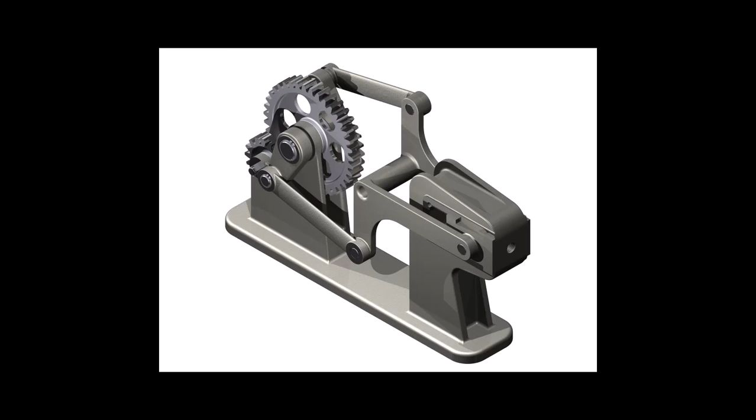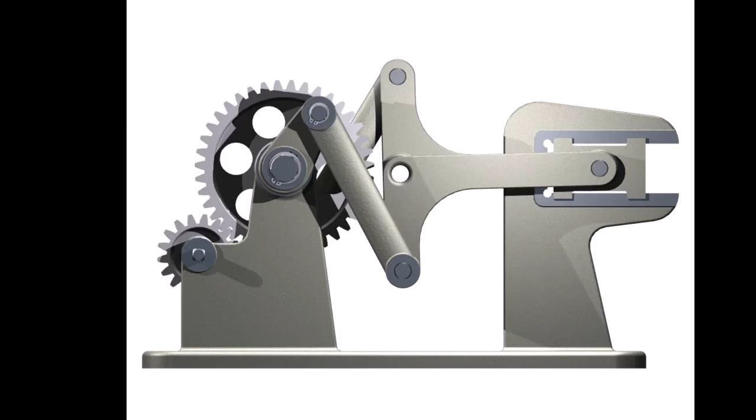Hi my friends, today we model this interesting assembly which is called double crank mechanism, and I want you to notice that the moving translation stops 3 times, which is important in some cases.

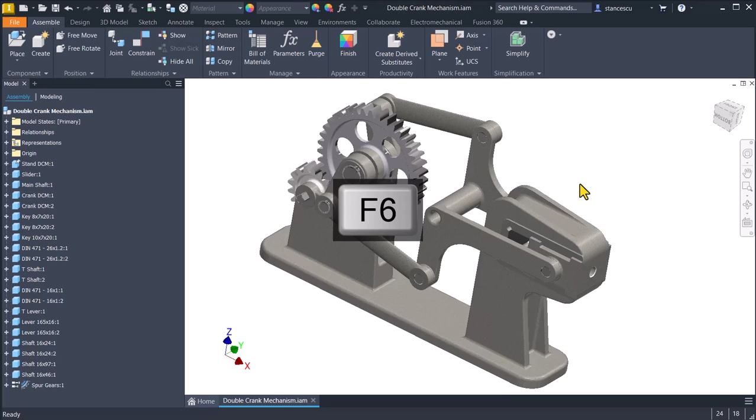This is the mechanism. You see there are some components here, and we want to place all of them to obtain the mechanism. All these are components of this mechanism.

If you are interested to create the spur gears, I recommend you take a look and watch my tutorials number 143 and 287.

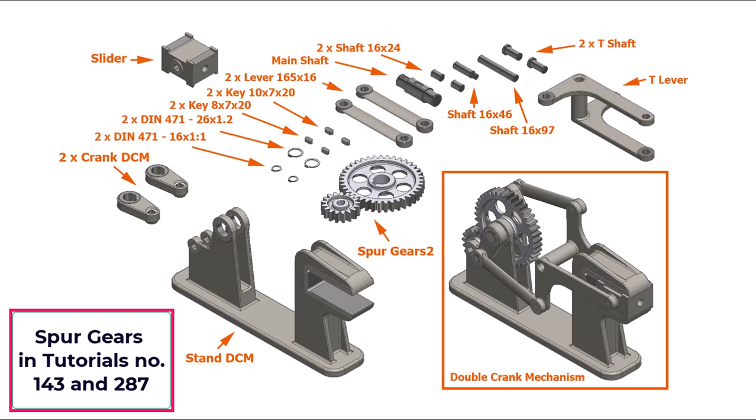Components are made with Inventor 2014, and you can download all of them if you have at least the journeyman level in the membership. After this overview, let's start building the assembly.

New standard millimeters IAM. Place.

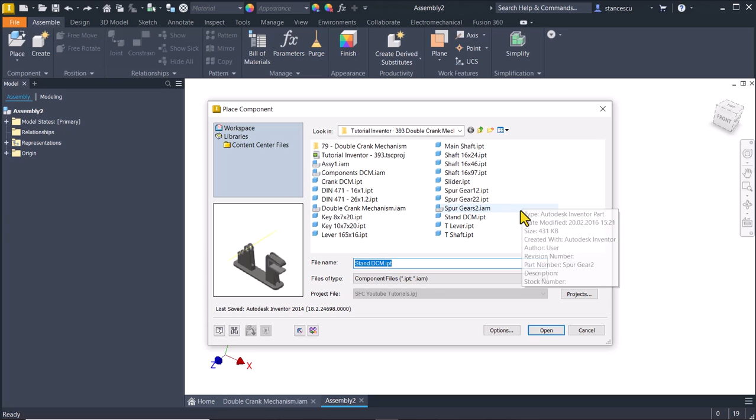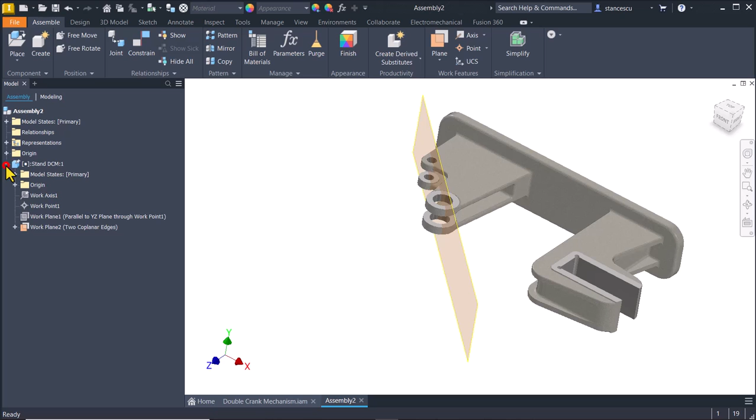We place the main component, stand DCM, grounded at origin, and as you can see, here is a plane which is not useful here, so I go to this and I apply visibility.

Again, we have to rotate this because now we work with Inventor 2024 and not 2014.

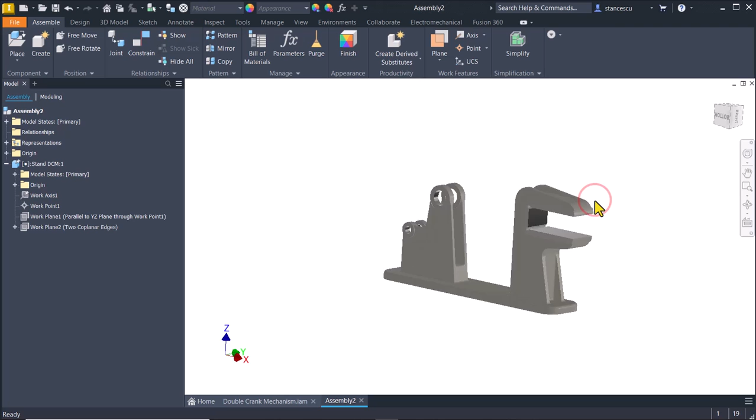Set current view as home, and we have the proper position. I want to apply edges, shaded with edges, to have a better look.

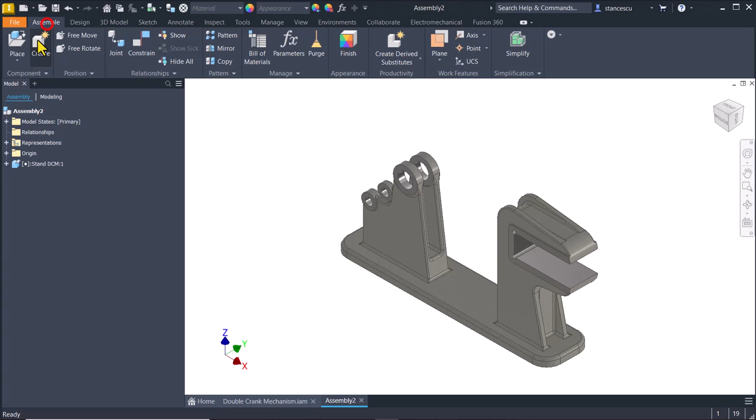Good. We add the spur gear, which is an assembly, as you can see. These two are an assembly, and I told you how you can create this assembly.

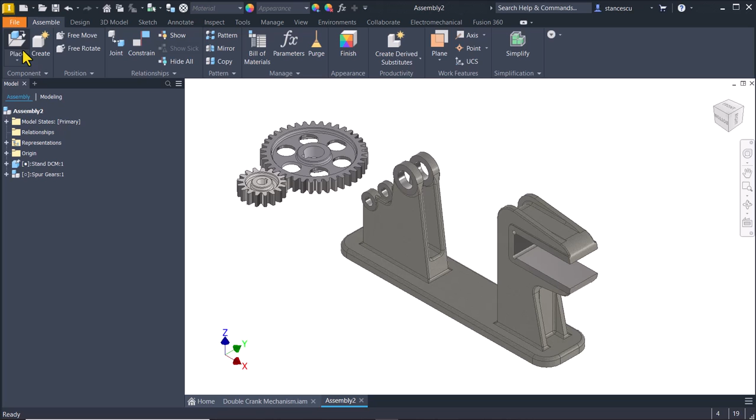Open, place here, and constrain. We constrain with the insert this circle axis to be placed here. Circle axis.

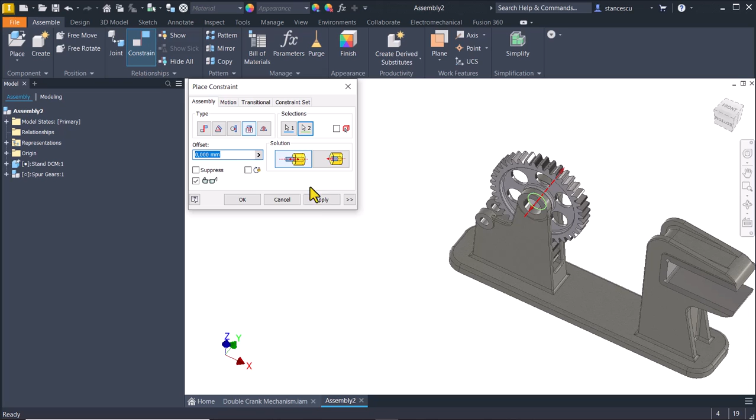Okay, now we can rotate all of this together. They are not flexible, you see.

We place now this point on this axis. Apply.

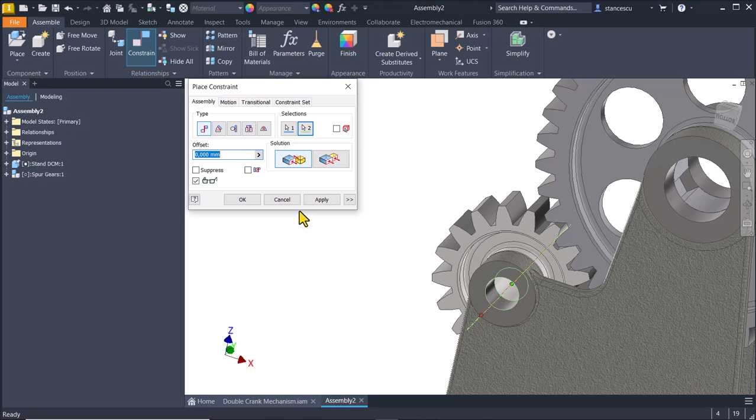If I make this flexible, we have a surprise. The surprise is that you can move this along.

Control Z, and we apply measure M from Monaco between these two faces.

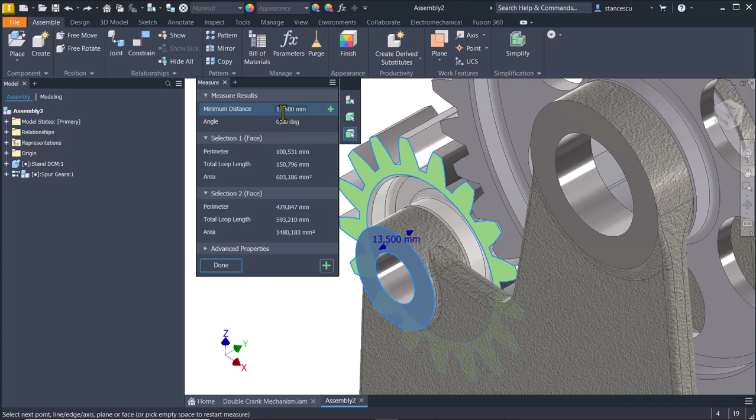13.5 is the distance. We use this distance to constrain with the flush, 13.5, between this face and this face.

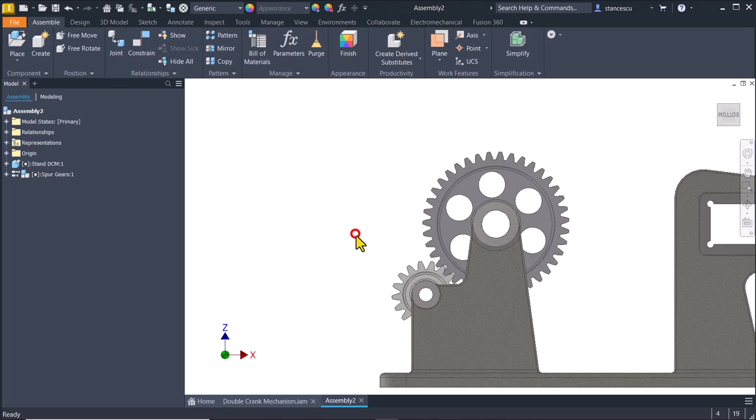Okay. Now we can rotate without problem this assembly, mobile assembly. Control Z. I place it in the first position.

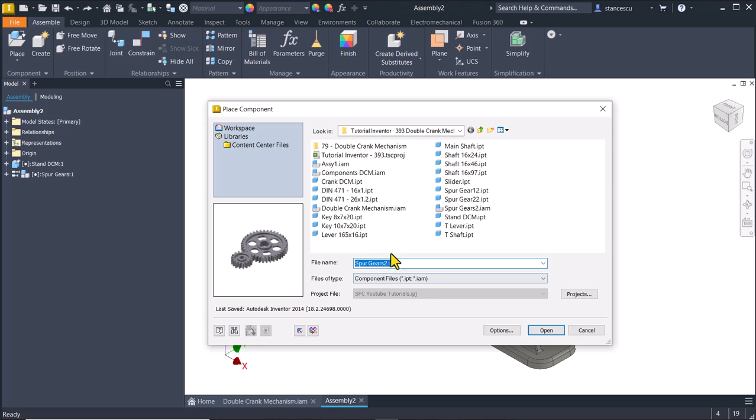Then we add some other components like main shaft. This is main shaft with keyways.

This one is the smaller, which are in 2 number. Then the other one only once.

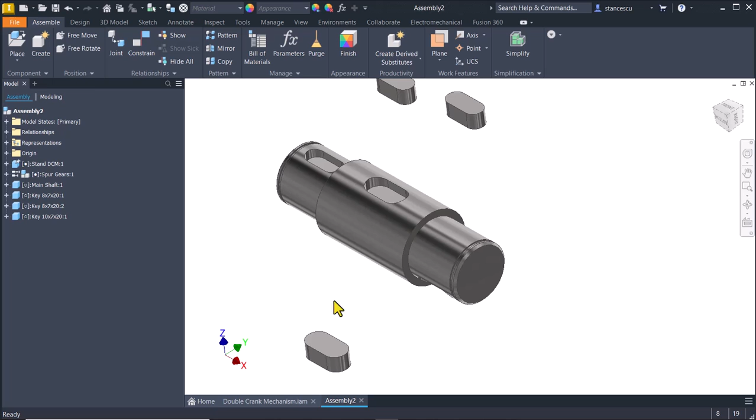We place, this is bigger, it comes here. Constraint, insert, this axis circle or arc and this.

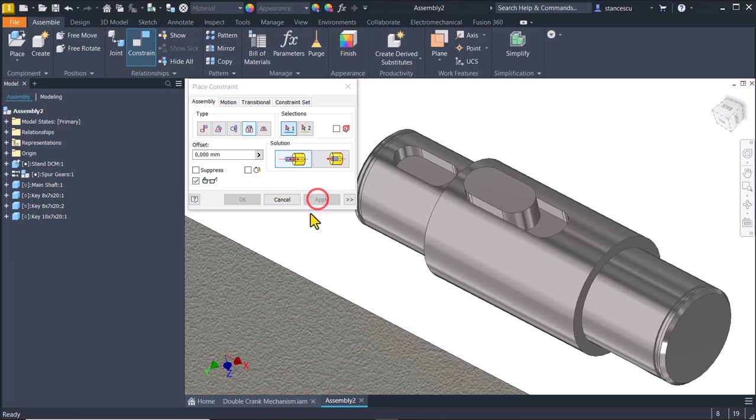You see, it is reverted. Apply. Then mate of this face to be placed on this face. Okay. Apply.

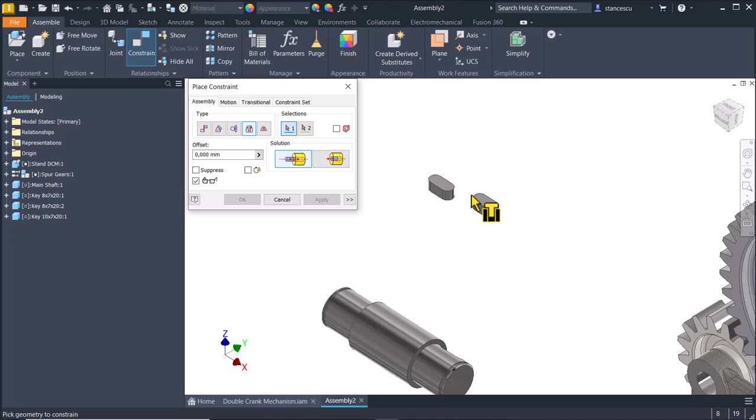We go now to the other keys. This one with the same constraint. Apply,

and this face comes to this face. I rotate it, you see.

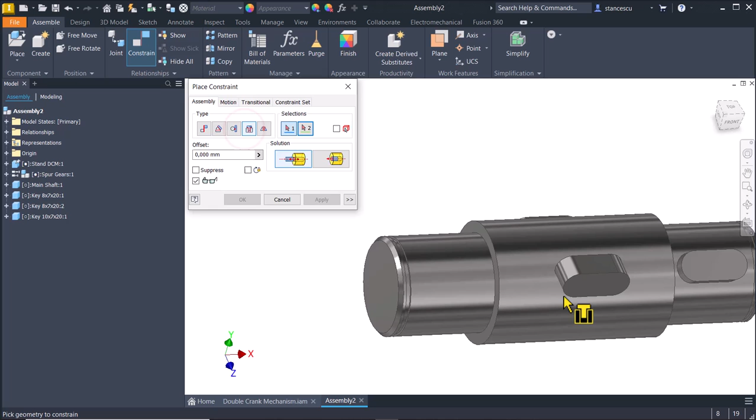The last one is this one to be placed here. Apply, and you see I can rotate this if I select this end, not this end.

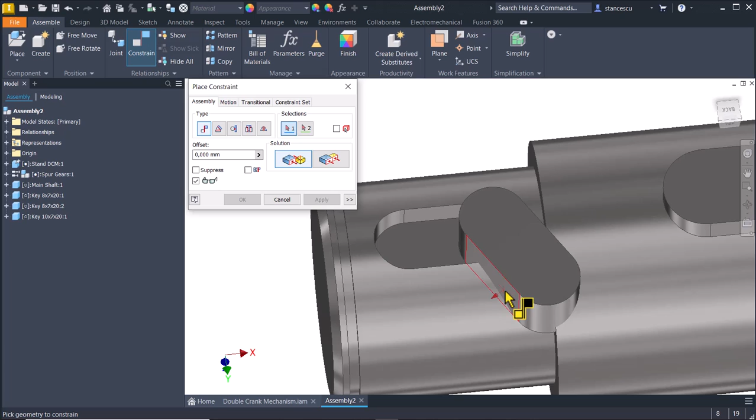Constraint this face with this face. Apply.

Good. I place this shaft inside this hole.

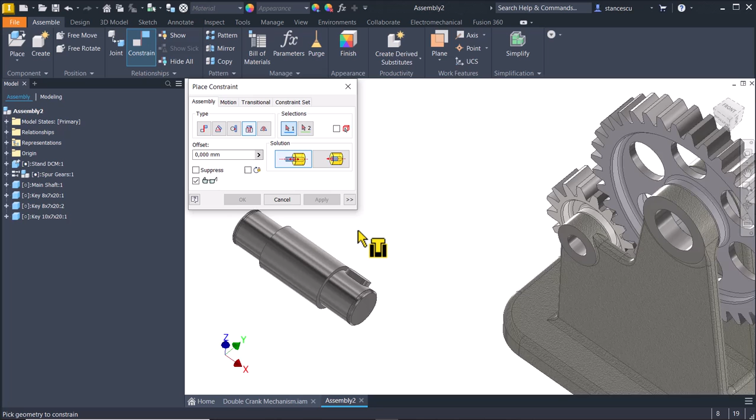Constraint. I select insert and I place this face on this face with a line. Okay.

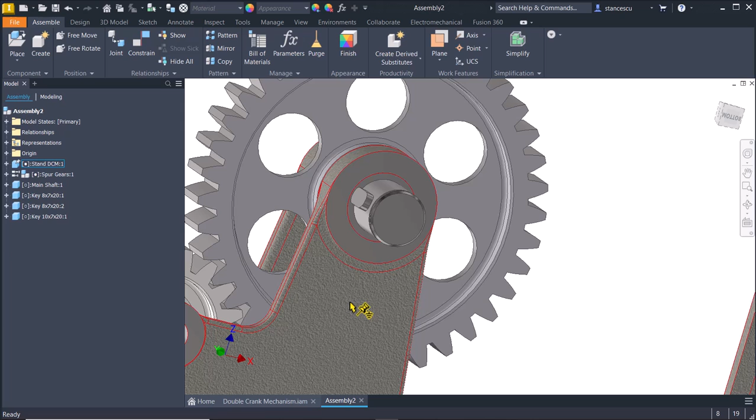Now you can see that we can rotate this and nothing happens to the spur gear. To see inside, I select the stand and I make it not visible.

Then, considering this to be fixed, I rotate this until we see the internal key, this one.

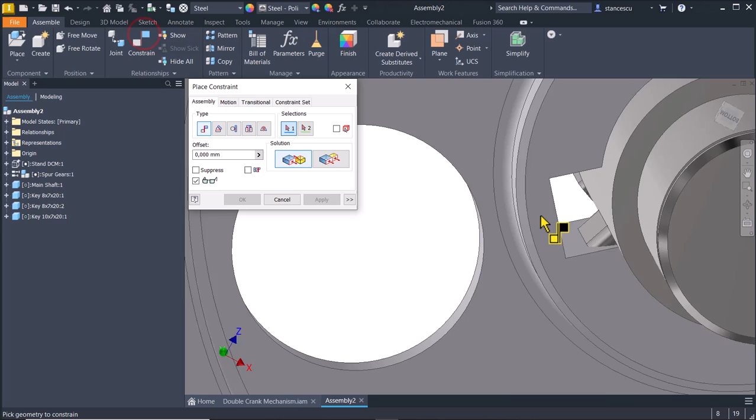We apply constraint of this, first this, and the second this. The shaft was rotated to be in a proper position.

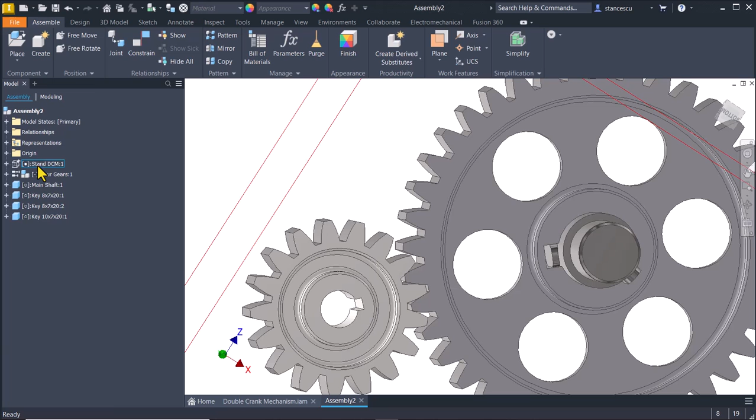See? Now I make visible again that stand. I have to eliminate to make not visible this,

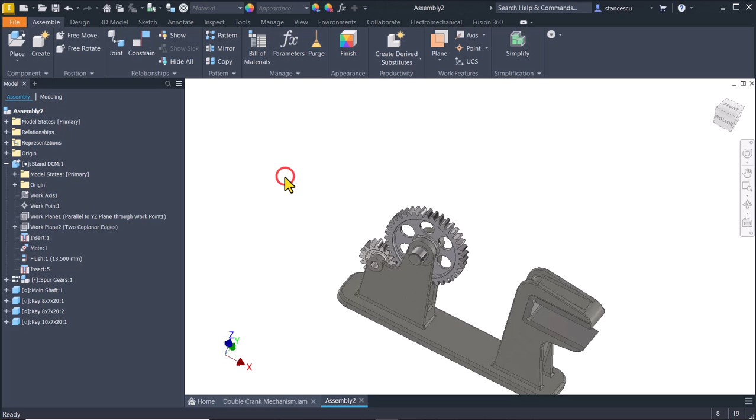and we have a consistent combination now. Now you know that we used here a lot of keys and keyways to make this correctly from the point of view of mechanics.

But especially I use now a shaft without any key to see that we can use in 3D modeling also without keys.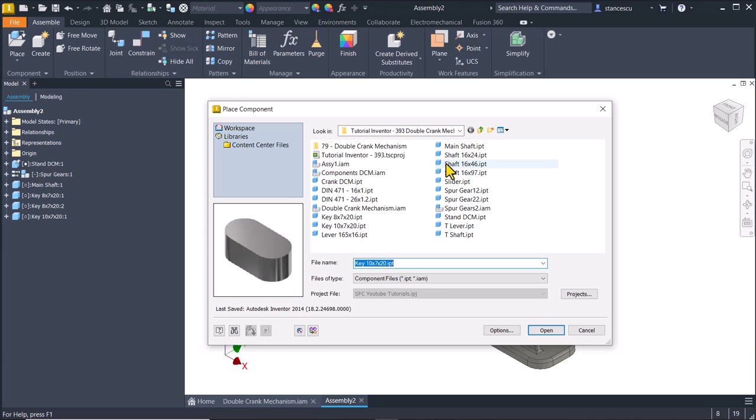Place shaft 16x46, which is without keyway. You see? No keyway.

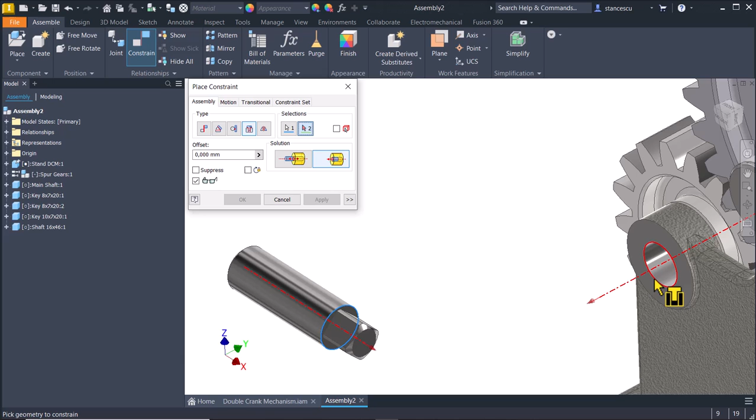Good. And what we do with this? Constrain, insert, aligned this face and circle on this face and circle. Apply.

Now we can apply constraints between work planes of the two objects. This is one, this is another.

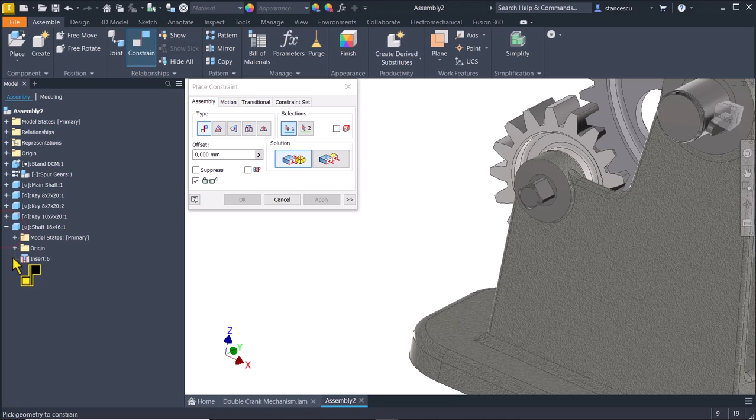This object has this plane or this plane to be selected. Let me select this one. The other one is the component of the spur gears, and I suppose is this one.

Let me see. Yes, I select this plane or this plane. I select this one. Yes.

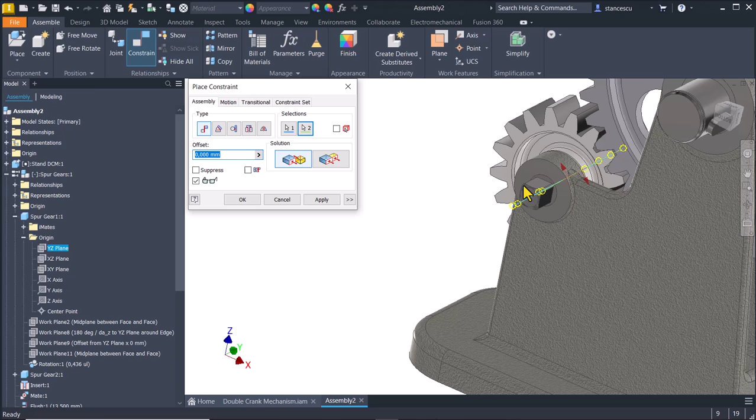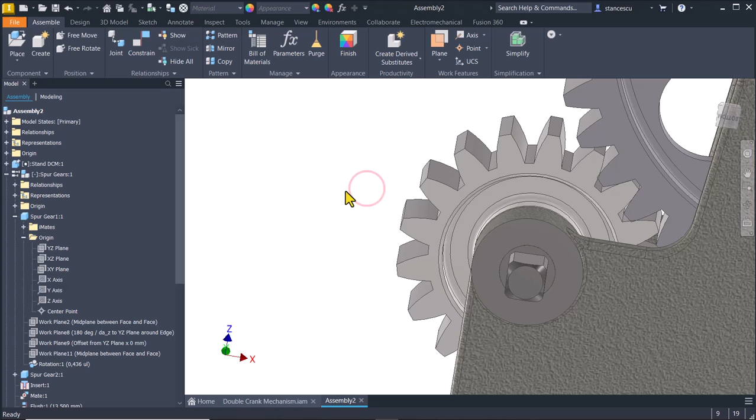Now this shaft is oriented in position with the spur gear. Take a look. You see, they are rotating together. Good. I close this to have space here for other components.

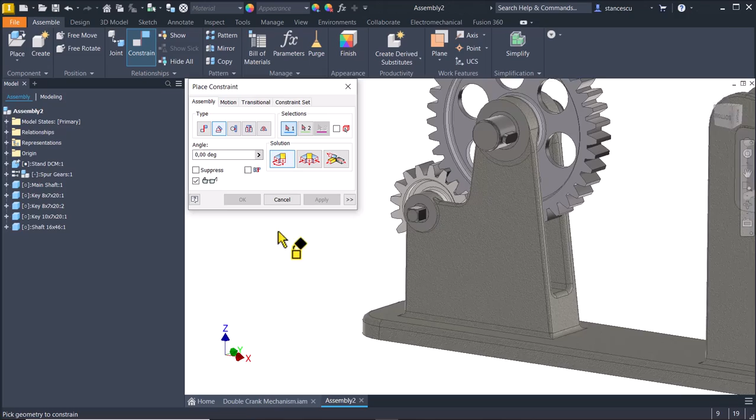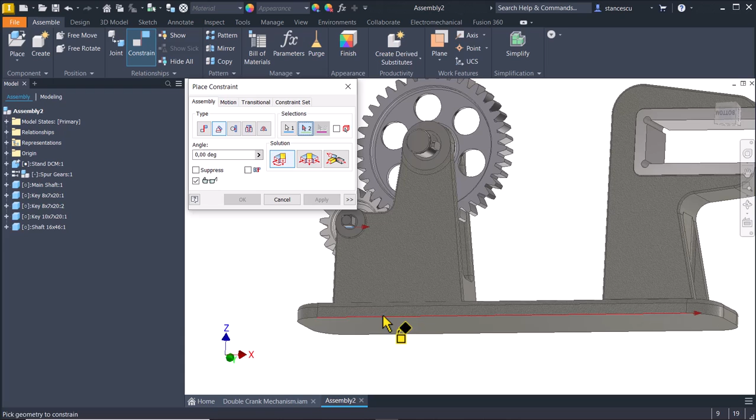More than this, I can apply constraint of angle. First solution, 0 degrees between this edge oriented to the right and one from here oriented to the right. For instance, this one. Now there was a small rotation here, but we have a starting point well known for all of us. Okay.

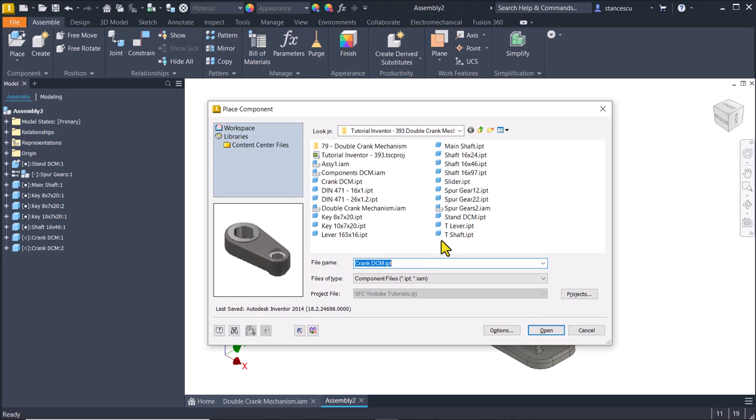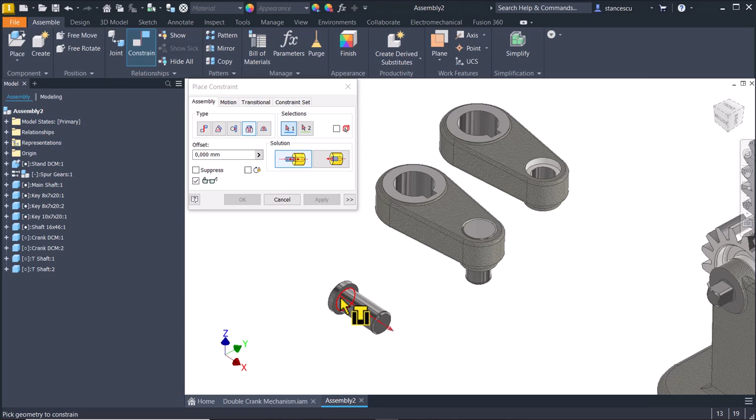We add now other components like the crank DCM twice, and also T shaft also twice. Constrain, insert this T shaft, apply, and the other T shaft, apply.

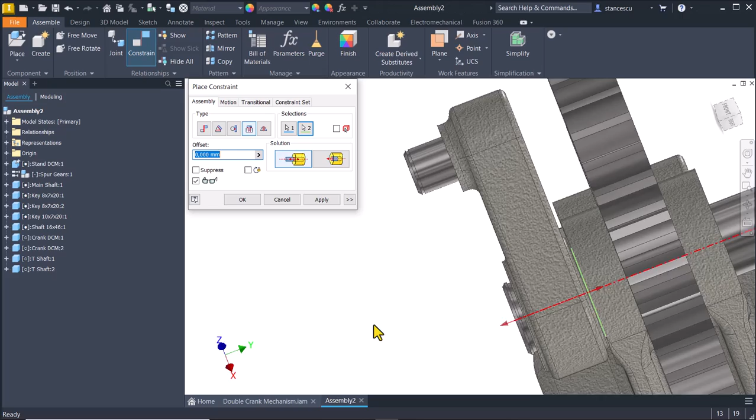We maintain this constraint to place this circle axis over this circle axis. Okay or not okay? Let me see here. I'm not sure, so I don't apply.

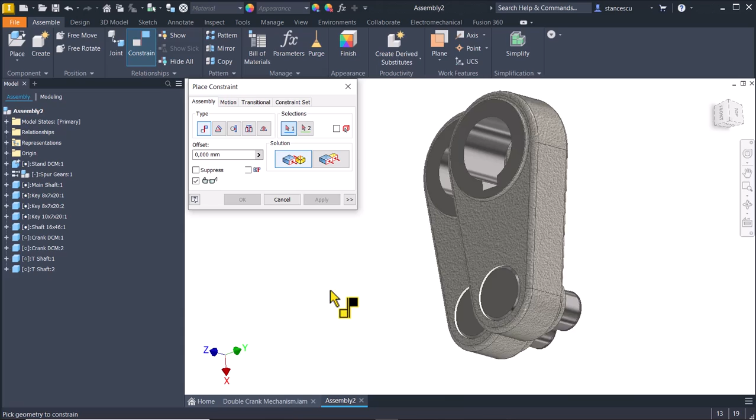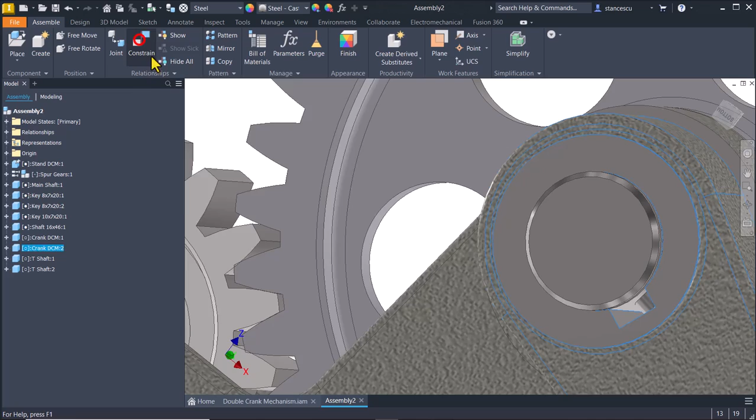Again, constrain, insert this. We must be sure of each step. Yes, it was okay. This is the place. Apply. Now we rotate this crank until we see the key inside. Here is the key. Constraint, mate this face with this face. Apply.

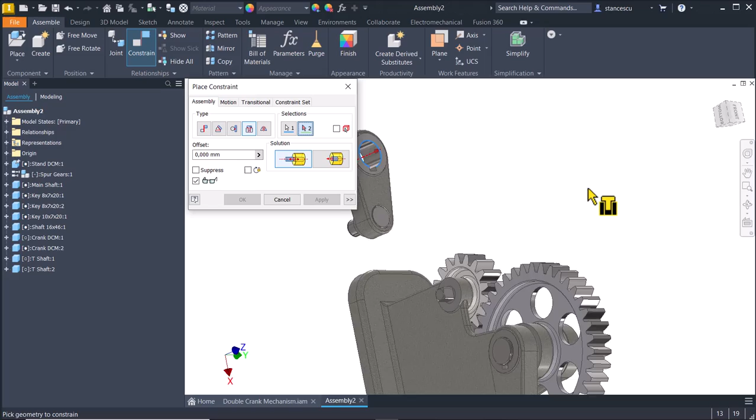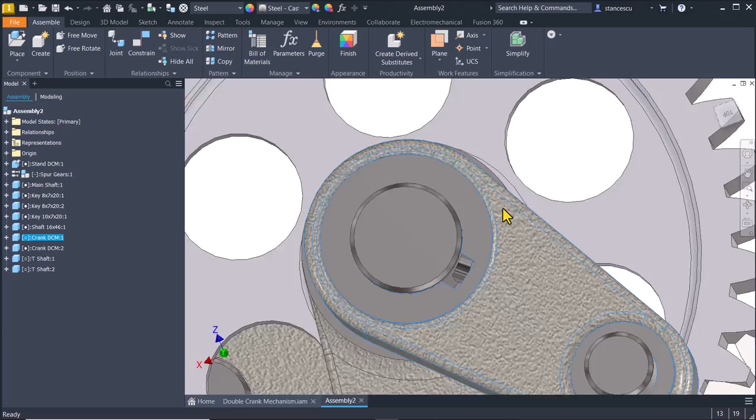We continue with inserting this circle axis here. Apply. Let's make the same procedure to find where is the key. Here is the key. Constraint, face on face. Okay.

We add now some important components. Lever twice, and T lever once, and the slider once.

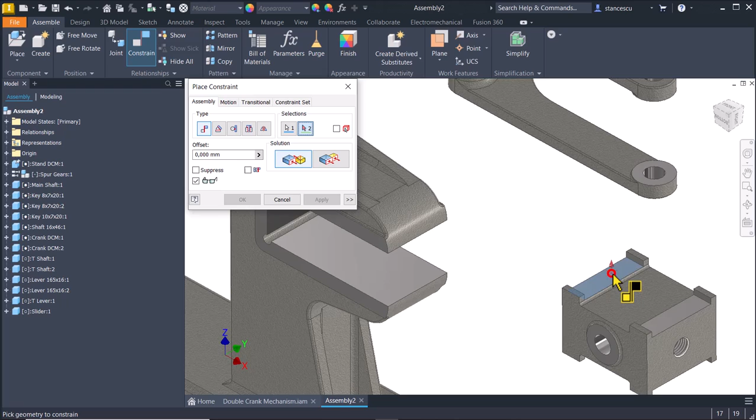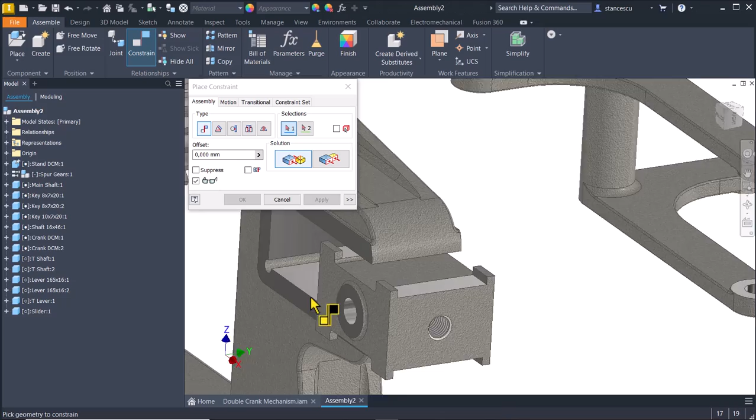Let's place the slider in its position. This face to be on this face. Apply. This threaded hole is only on one face, and this is the correct face. Then we apply contact between this face and this face. Okay, apply.

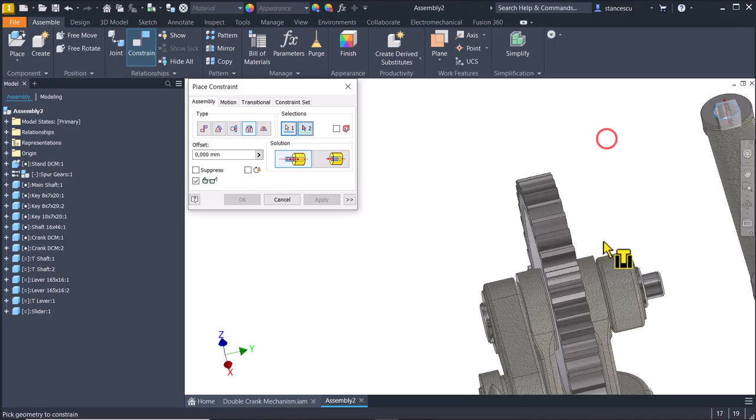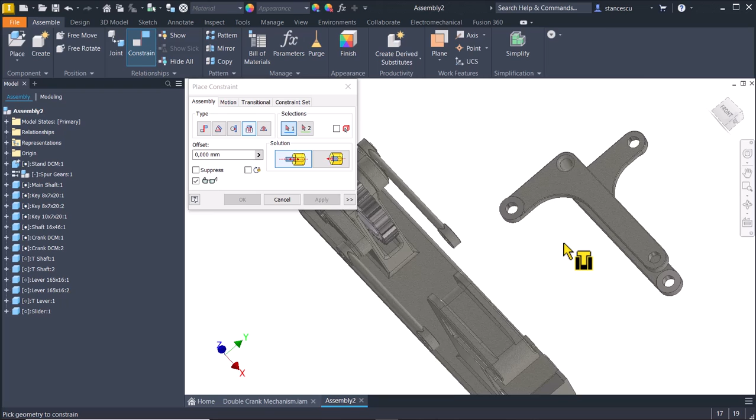We use insert to place this lever here, apply, and the other lever right here, apply. We connect this T lever using the same constraint. This comes here, apply, and this goes here, apply.

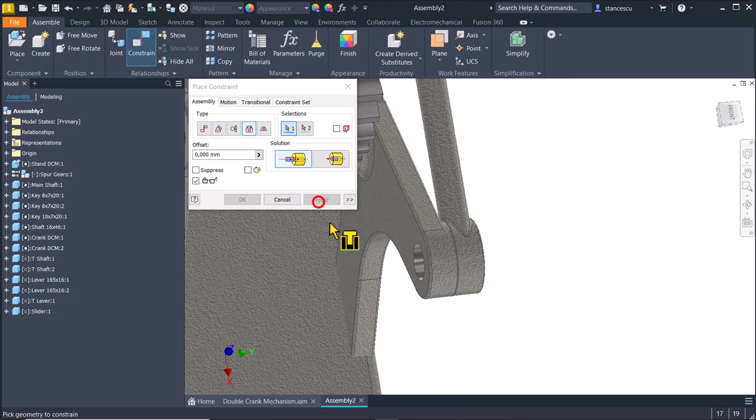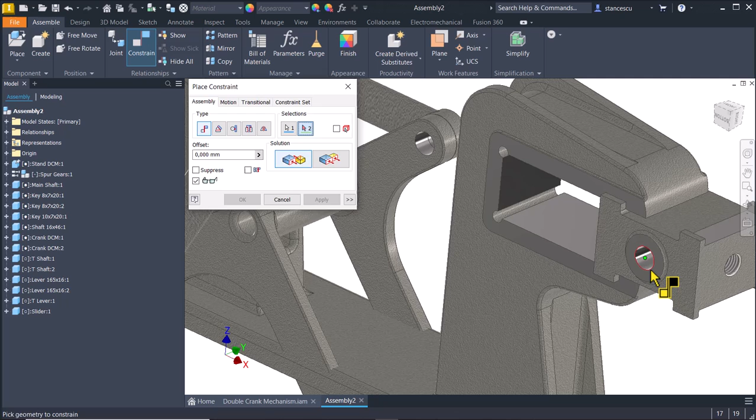Now we have connected all of them, almost all of them. We apply constraint of this axis over this axis, or point is enough to apply on a point. The other arm is of course in position as well.

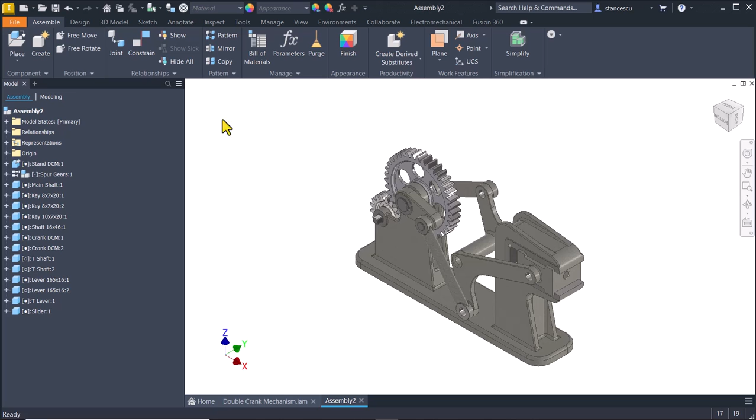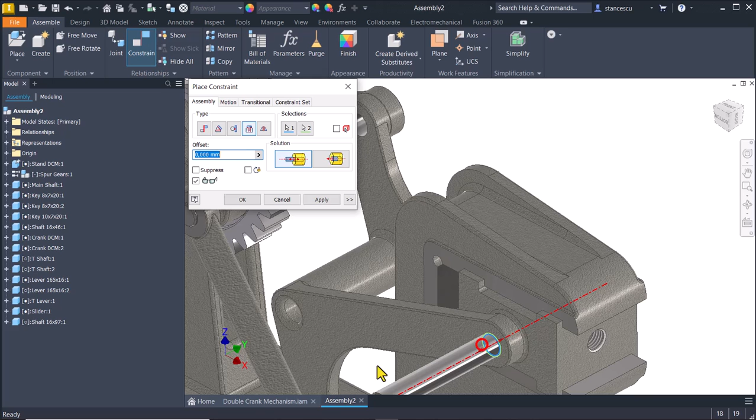We add now some shafts. Place shaft 97 to be placed aligned, insert with this aligned. Okay.

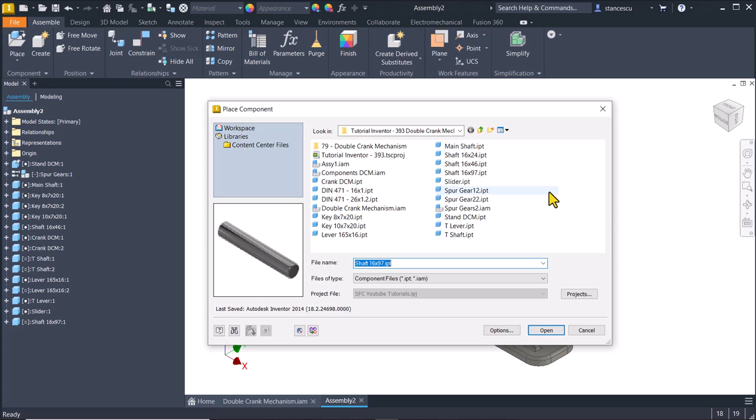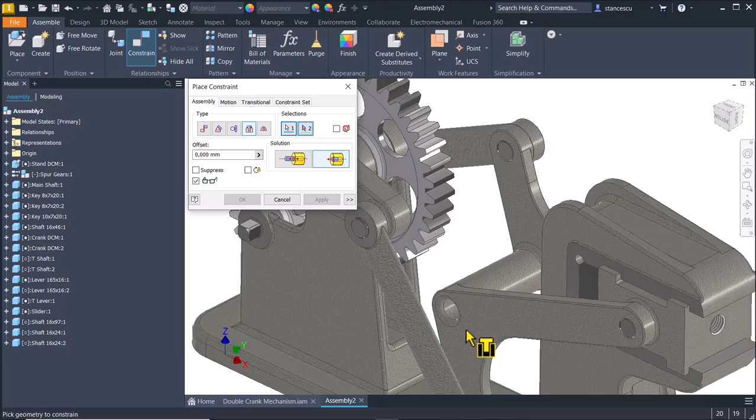Good. Other components are the two short shafts, these ones, 1, 2. Constrain, insert, aligned this face to this hole, apply, this face to this hole.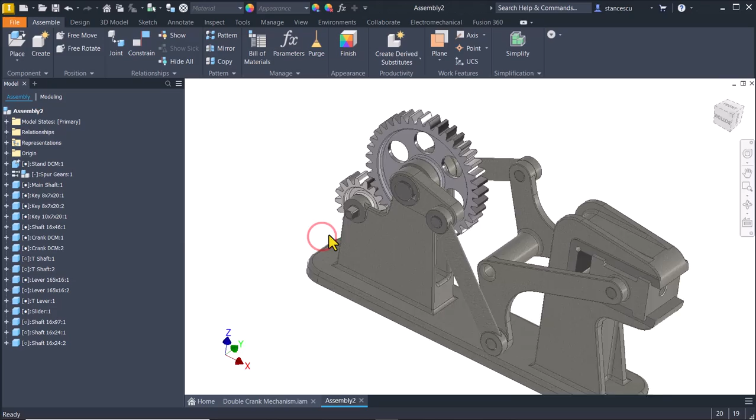Okay, they are placed here, even if we don't need them when we make such a simulation. Now we go right to the animation.

Everything is placed. Oh, not all components are here. Let me place the other.

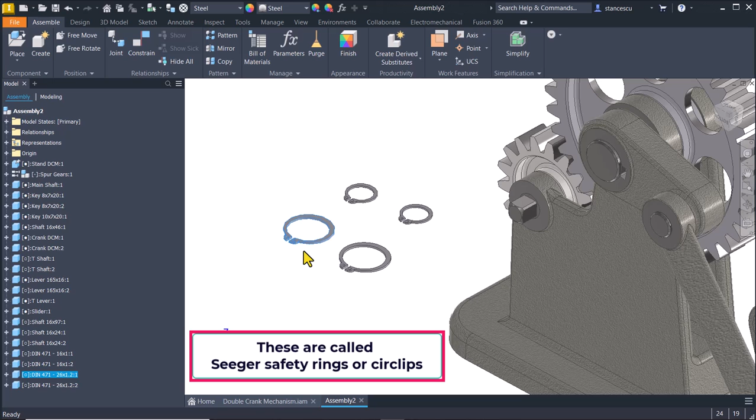Place this two kind of rings, 2 and other 2, smaller and larger. These are called Seeger safety rings or circlips. You know them, I suppose.

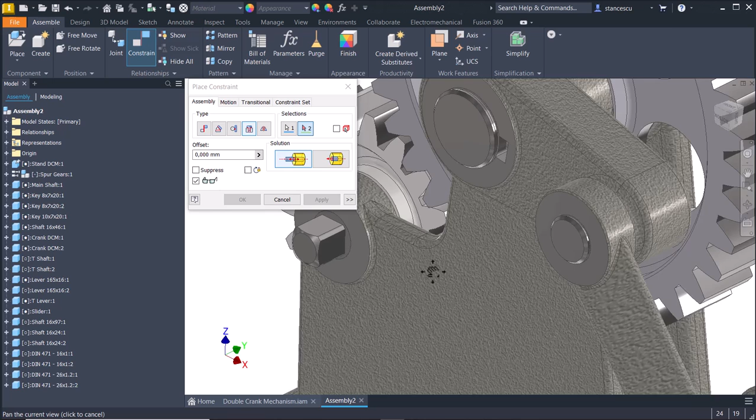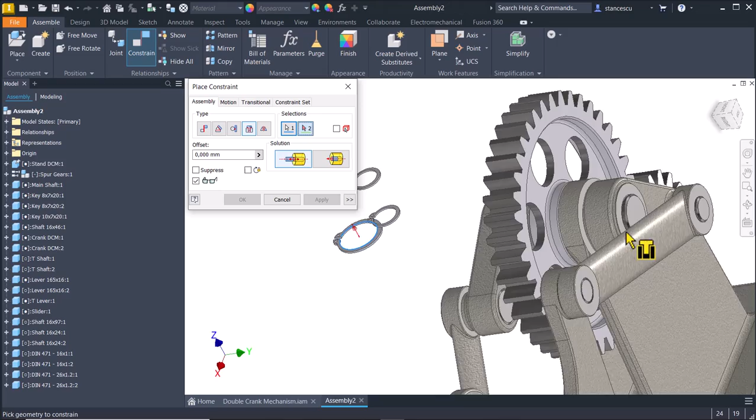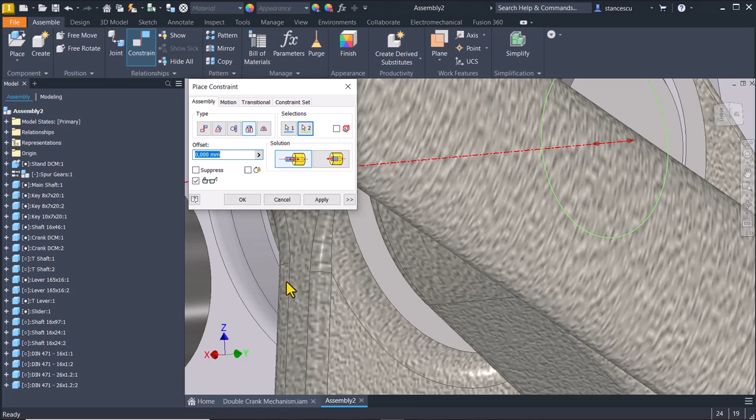Constrain, insert this circle to be placed on the greater shaft here. You see what we have here. Apply. The other one on the other side. And this one which goes right here. Good. You see, it is here. Apply.

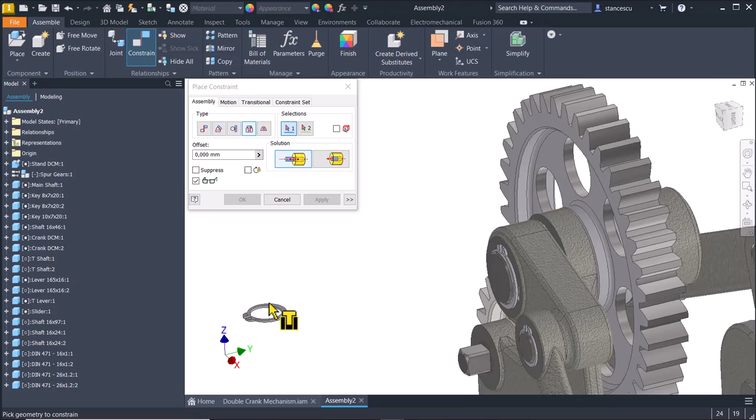The other two goes here. Apply. And on the other side, which means right here. Okay, now we have the final assembly.

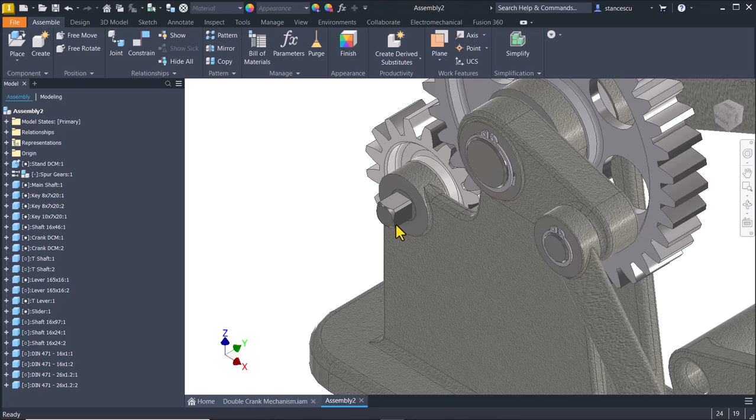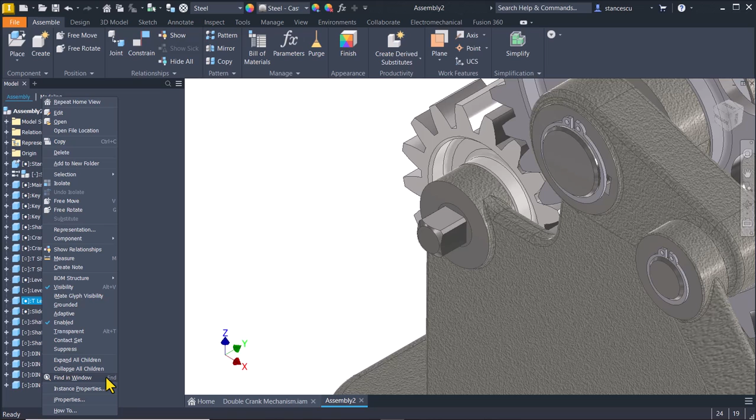We know that we have an angle to this shaft. Click on it and we identify which one is. I go here, but let me tell you something. If you want to see what is this, you can use find, or you can use the keyboard, the key end on the keyboard, and you see what is that part.

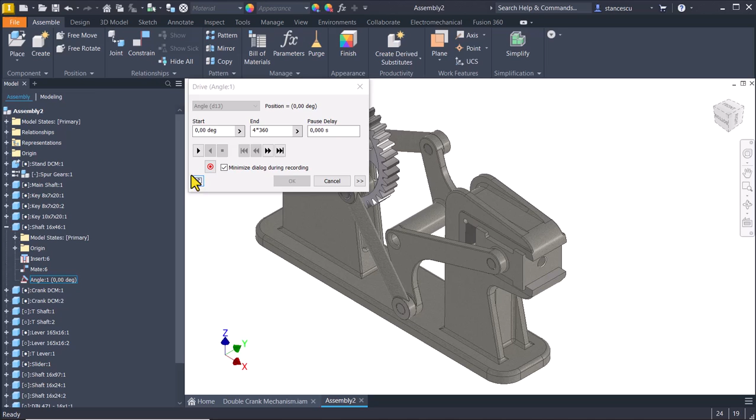Yes, but now we are looking to this. We open it, we apply drive, we place here 4 times 360 degrees, and I place it in position, start. You see how it works with that 3 stops. 1, 2, 3. This is interesting. Yes?

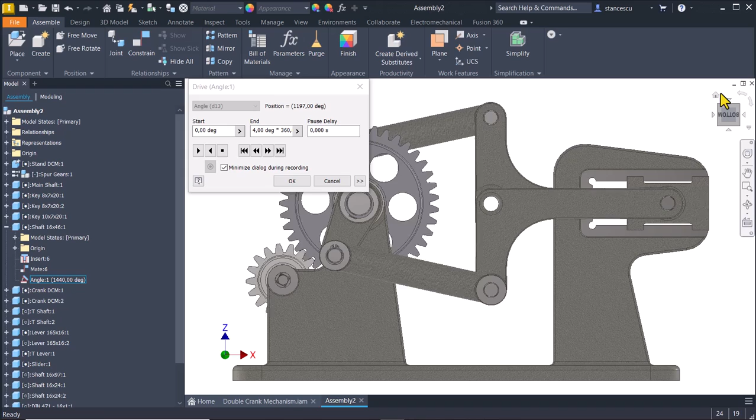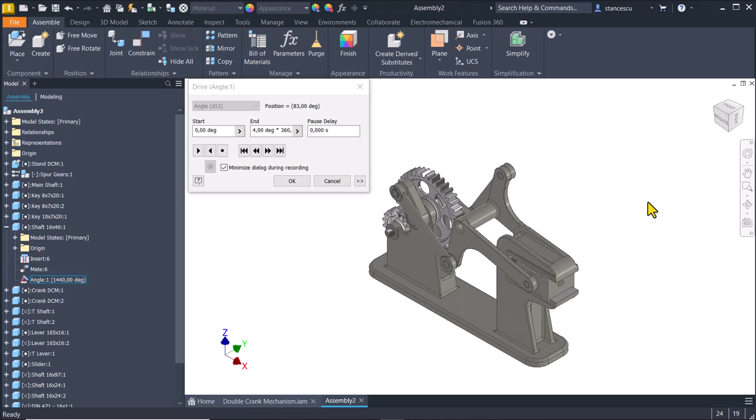And back to see again the movement, the animation. Very nice. You see? Okay.

Now comes an interesting topic. What I present here is based on the existence of the components that appear in the assembly. Regarding this modeling, you have two options. One, to contemplate what I do and apply my actions by creating your own components of this assembly. And two, try to create the assembly using the actual components you see in the tutorial. If you want to create this assembly independently, you must own the component, that is, they must be yours.